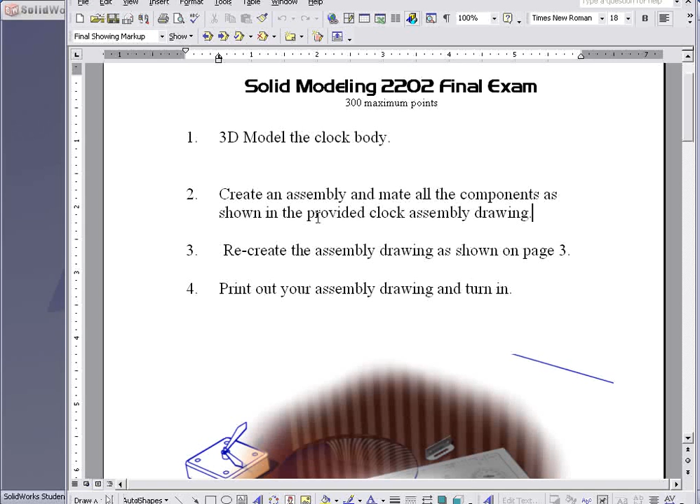There are components already in your folder. If you look under your SolidWorks sample files, you'll find the clock parts, and they're all inside of a folder. So here's actually the drawing that you can use to generate the model that we need to create first in order to create the clock.

So we begin by going to SolidWorks and go to File, New, and make sure that you are in an ANSI inch template. Most likely you don't have these templates on your computer, so you'll have to go over to the tools options over here and make sure you select ANSI and inch with 3 decimal places.

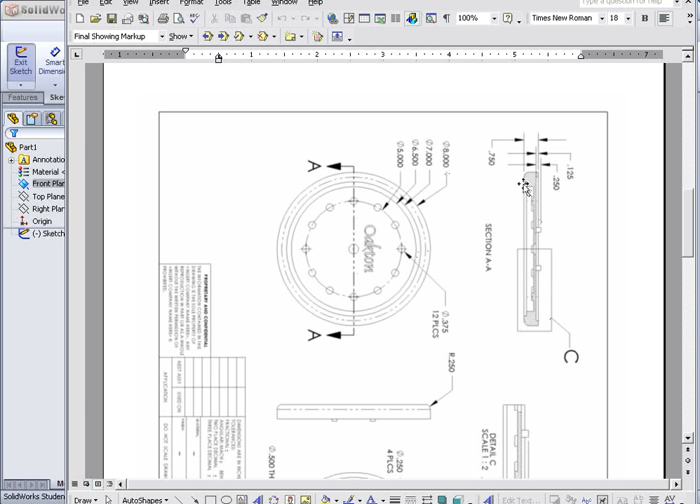Okay, we're going to begin by selecting the front plane and start our sketch. Now as we look at the drawing here, basically it's just a circle to start off with, an 8-inch diameter circle, and the thickness is going to be about 3/4 of an inch. So let's take the circle tool, drag out our circle, go to Smart Dimension, and plug in 8 inches.

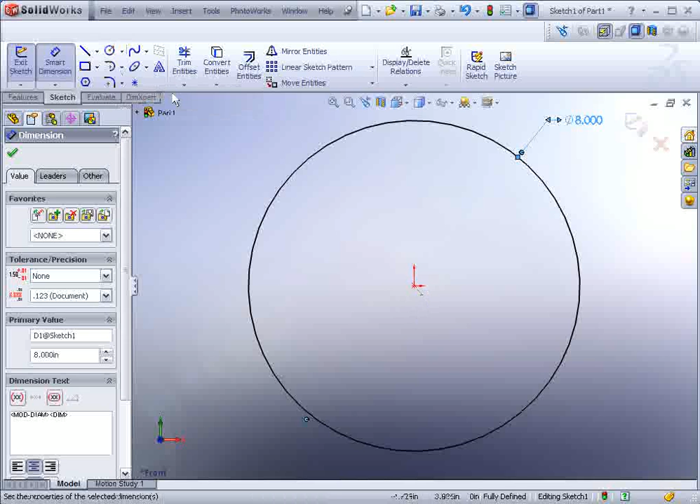Now we could go to Features. Actually, we could put the center circle in as well. Might as well get that out of the way. And that's a 1/2 inch diameter. Okay, now we could go to Features and Extrude Boss 0.75.

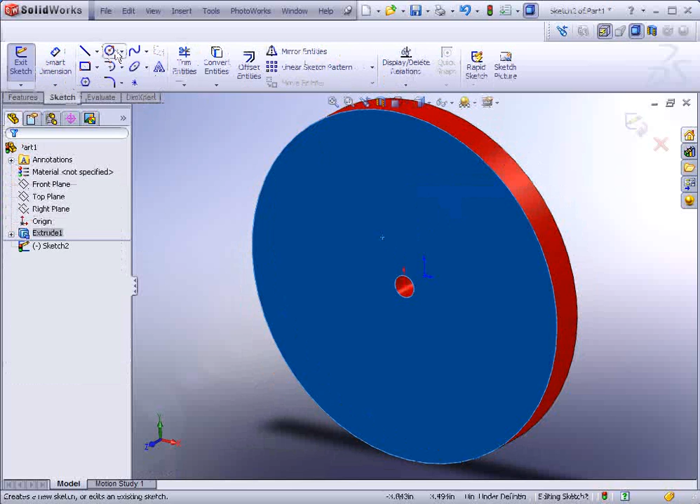The next thing we're going to do, we'll select this face here, start our sketch, draw another circle from the center out, and dimension that. That should be 7 inches according to the drawing here. And that's going to go a depth cut of 0.125. So we go to Features, Extrude Cut, 0.125.

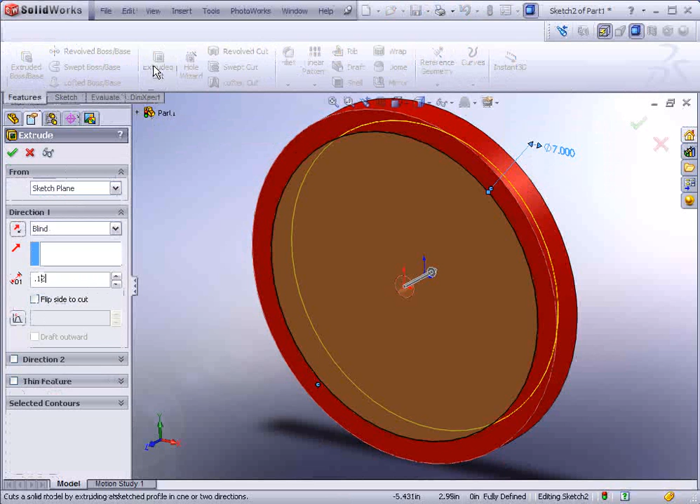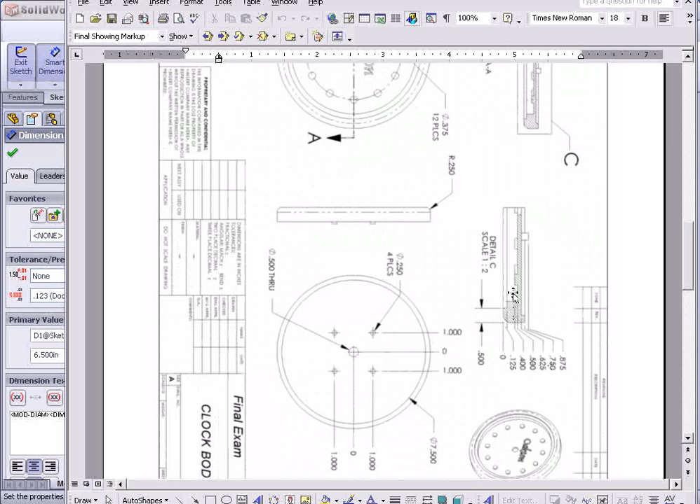Okay, now we're going to go ahead and start another sketch right on this face. And again, in the center of the circle, this is going to be 6.5. And as we look at the drawing for that 6.5 inch depth, we can see we drew it off of this face right here, so we just need to go down to a 1/2 inch. So we go to Features, Extrude Cut, 0.5.

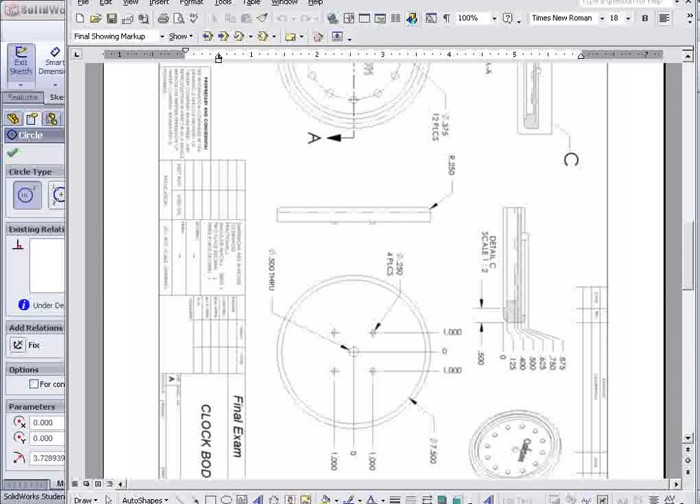Okay, the next step is let's go ahead and flip it around and select the back face, start our sketch, and draw a circle there. And according to our print, we can see that's 7.5, and that goes a depth of 0.125. So we'll dimension that, 7.5. And then Features, Extrude Cut, 0.125.

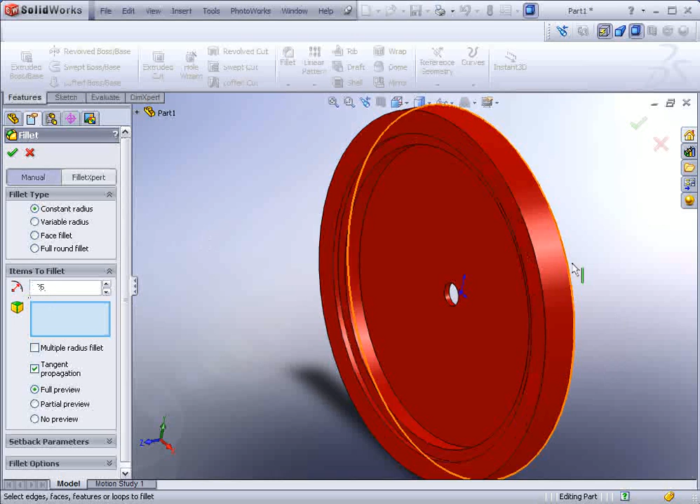One thing you don't want to forget, make sure you put the fillet on. The fillet, according to the print, is going to be 0.25. Select the edge and apply.

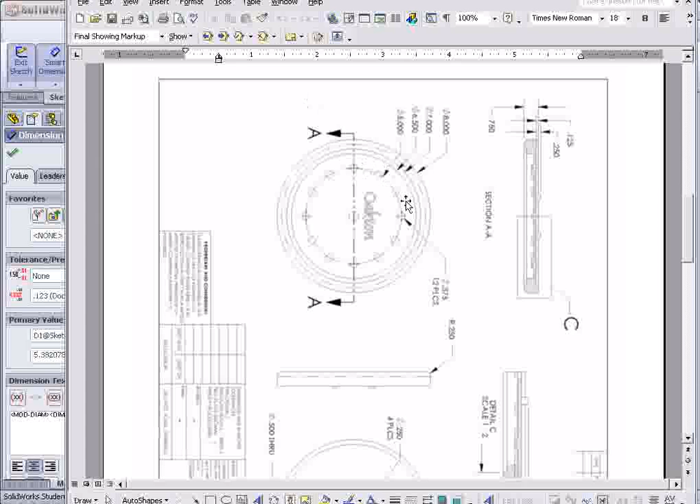Okay, now we're going to put one of the little buttons on here. So we'll start a sketch. We're going to draw a circle from the center out, and right away make sure that's set to for construction. This is very important. While that circle is still selected, check the for construction box so it's dashed, meaning that SolidWorks will not try and extrude it when you add this material. So now we could go and dimension that. And according to the print, that is going to be 5 inches.

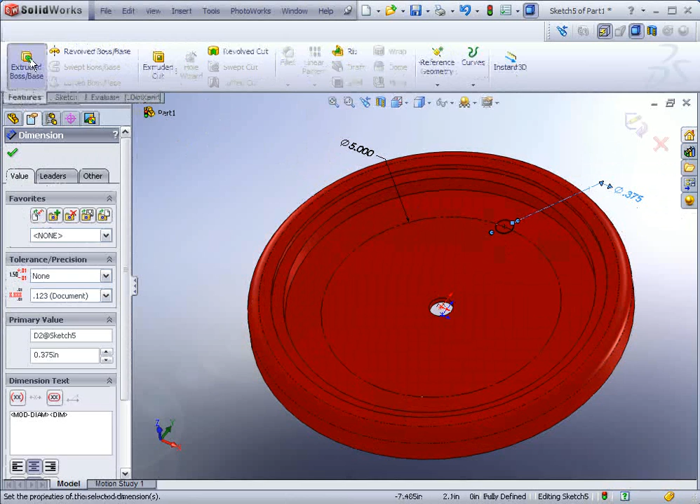And now we could take the circle tool again, and at the quadrant up at the top here, draw out a circle and dimension it according to the parenthesis, 0.375. And now we go to Features, Extrude Boss, and that's a raised boss of 0.125.

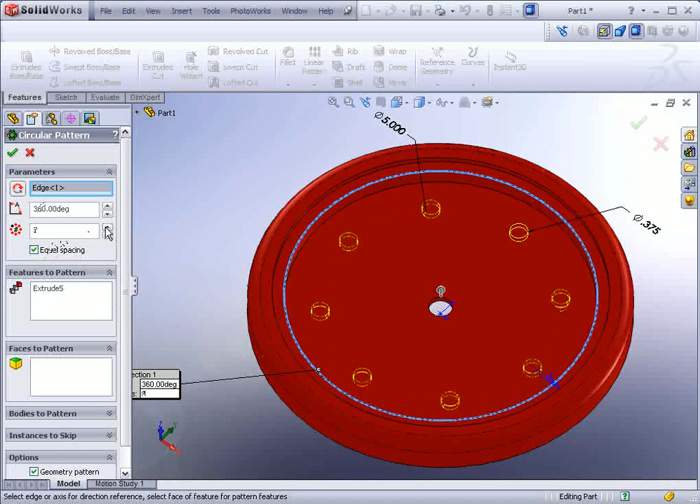And now we get to make a circular pattern of 12 of these. So we go to where it says Pattern here, Linear Pattern, find Circular Pattern, and the axis for the pattern can be any of these edges. And make sure it's set to equal spacing, 360 degrees, and make sure there's 12 instances. And apply.

Okay, now we have to work on the back side, so we'll select this back face here. We'll go Normal To, and we'll draw some center lines. So we go to the line, instead of line, make sure you select center line, draw a vertical center line, and then a horizontal center line.

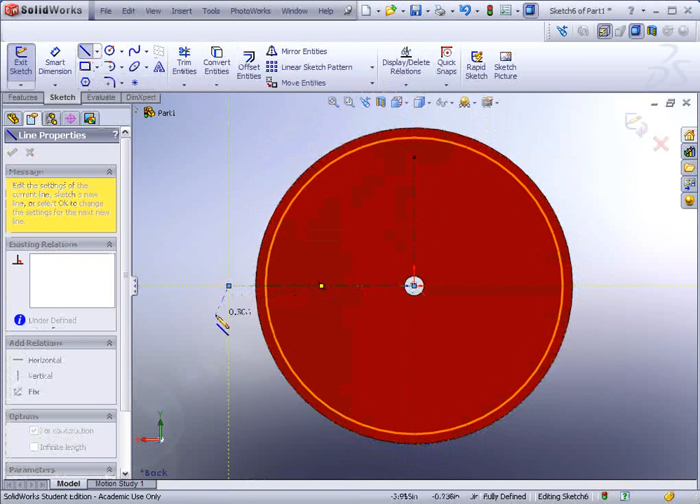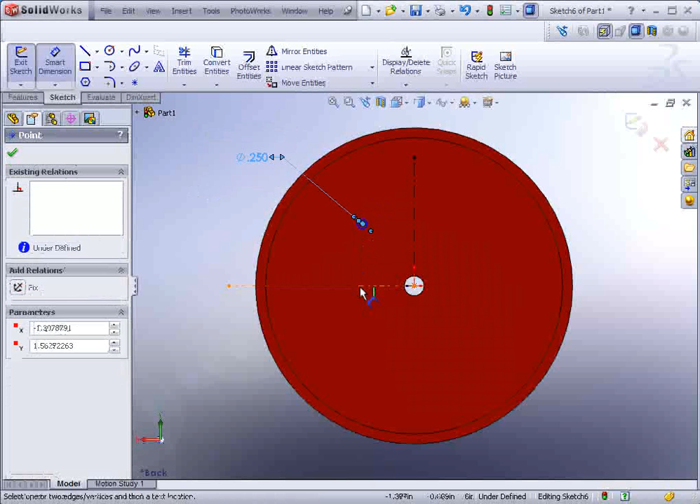And draw a circle right in between those two there. And let's dimension it. And the diameter, I believe, is going to be 0.25. And it's 1 inch from the center. And make sure you locate it 1 inch from this edge and 1 inch from this center line.

Hit apply. Now you just have to mirror it. Click and drag a fence around the vertical center line and make sure you envelop the circle itself, and then you should be able to click on mirror entities.

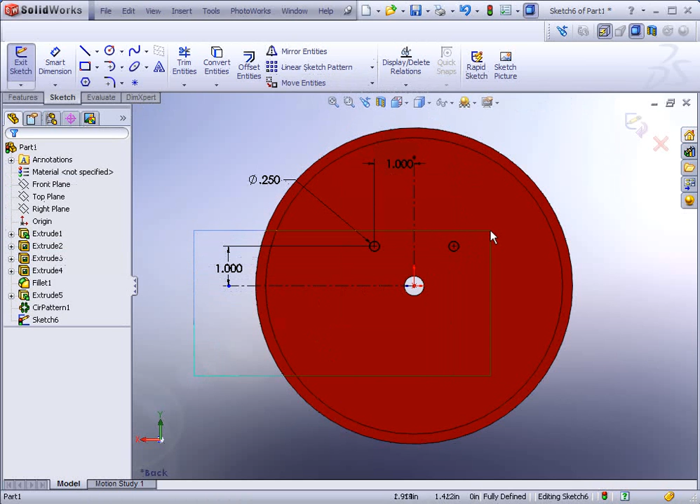Now click and drag a fence surrounding the horizontal center line and the two circles. Make sure that if you drag it from left to right, that you don't have the vertical center line in the selection mode. If so, you could always hold the control key down and click and deselect it. And we'll hit mirror entities again.

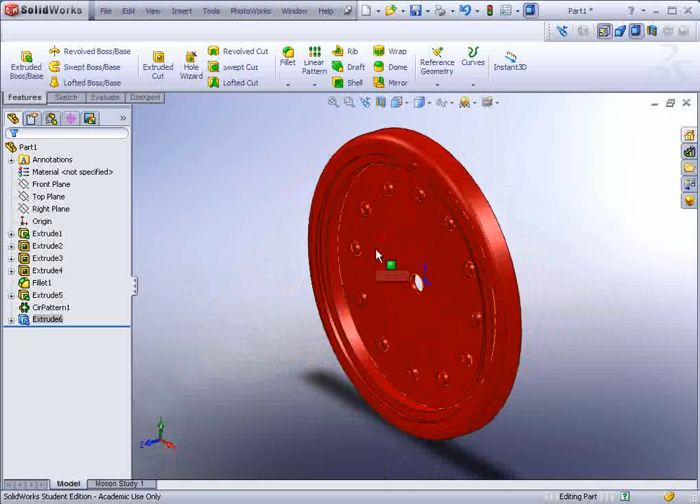So now we have our 4 posts, which we just have to extrude. And these get extruded 0.25 high. And that completes the first part of this test. Now just make sure you save this. And we will save this as the clock body.

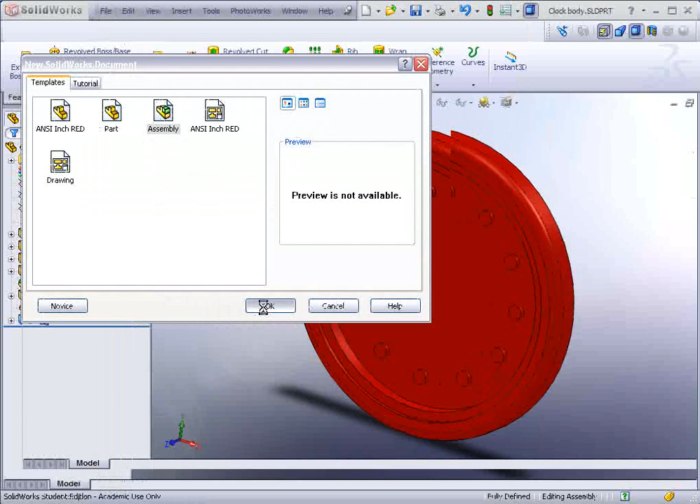Okay, step 2. Now we get to bring this into an assembly and start building it. So what we're going to do is we're going to go over here to File, New, and select Assembly. And we could select the clock, and we could drop it in at the origin. If you don't see your origin, go to View and turn on Origins. Drop it right in at the origin. There it is.

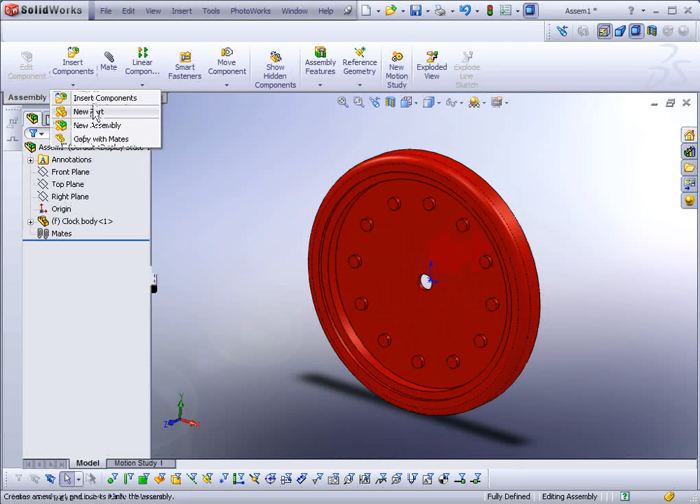And the next thing we're going to do is start inserting the other components. So to insert the other components here, it's just a matter of going to Insert Components and select that. Go to Browse and make sure you locate your Manufacturing 2202 sample files and final clock parts. And the first thing we'll drop in here is, let's drop in the chrono housing. Hit open, drop it right over here.

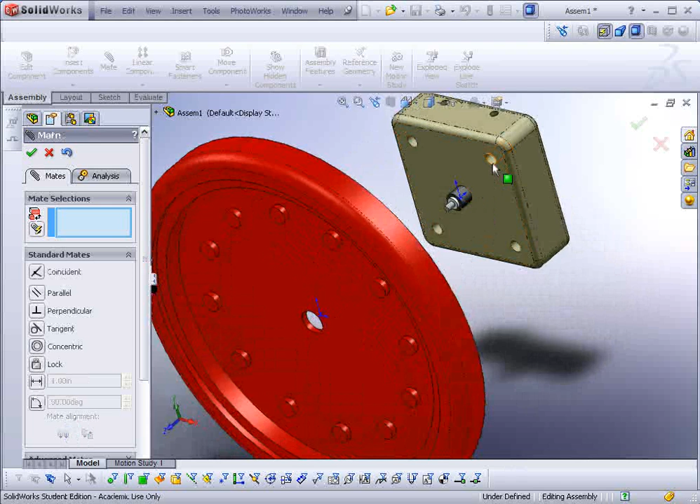And now we have to mate that, so we'll take the paper clip, we'll select this face here to this face right here. Make sure it's pointing the right direction. In this case it's not, and that's why we have this little button here, Flip Mate Alignment. The next thing you could do is you could select the edge of one of these holes and make sure you find the aligned hole to it. Select that edge. And there it is. Completely mated. Needs no more mates on that particular one.

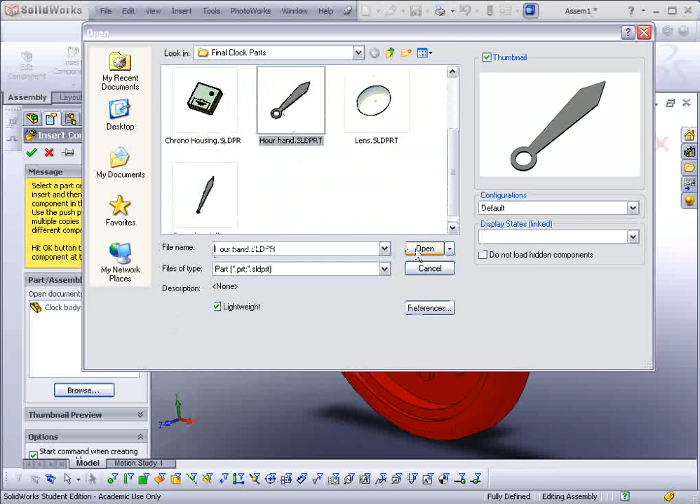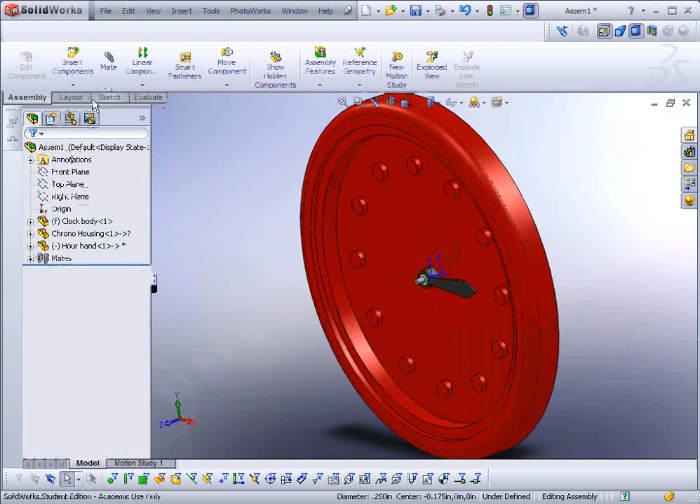Let's drop in another component. Insert Component, Browse, and let's start dropping in the minute hand. Actually, we'll drop in the hour hand first. Click and drop in front. Select the mate, select this edge, and make sure you select the edge transition between the black and the white surfaces. And you might need to flip it so it's not overlapping the model or intersecting. Okay, hit apply.

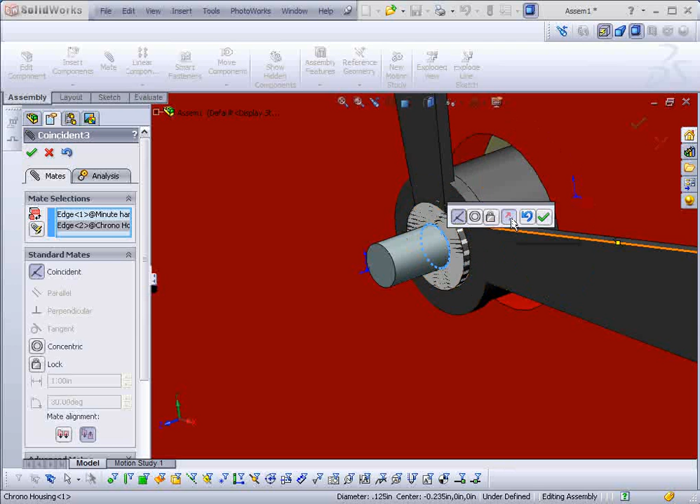Let's go back to Insert Component, Browse, and we'll select the minute hand now. And do the same thing. Go to Mate, select this edge here, and select the transition between the gray and the white surface. So right there, that edge. And if you see a zebra stripe, that's an indication that there's an interference taking place. So just make sure you hit the Flip Mate Alignment so it flips on the outside. Okay, and if you did it correctly, it should point to 3 o'clock.

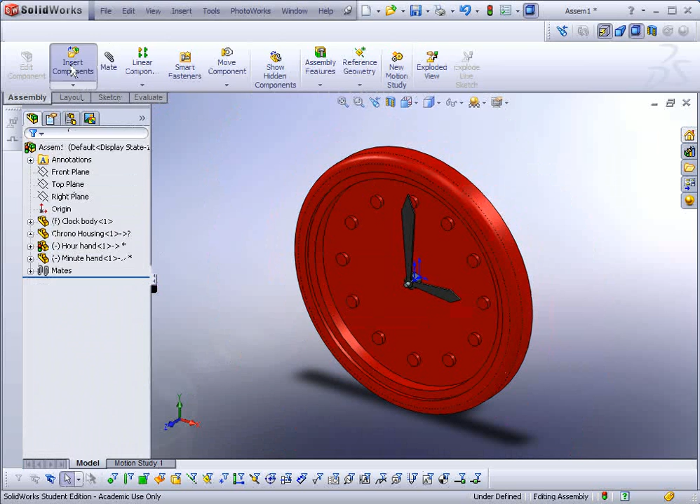Also these can be moved, so it's not really a big deal if for some reason something happens and they don't look exactly right. But next thing we want to do is we're going to go ahead and drop the lens in. So again, we go to Insert Component, Browse, let's find the lens, drop that over here, select Mate, select the edge there, and then this little lip. And we can see it's in the wrong direction, so again we hit Flip Mate Alignment and apply.

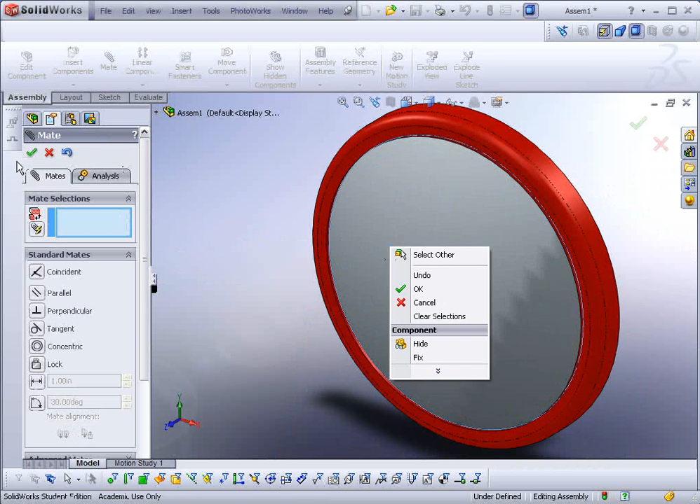Okay, if you want to see through that lens, it's just a simple right click. Actually, we'll hit apply first to get out of Mate. Now you could right click on the surface of it, and there's this change transparency option. It's not a requirement, but if you want to see your clock body components inside there, that's not a bad idea.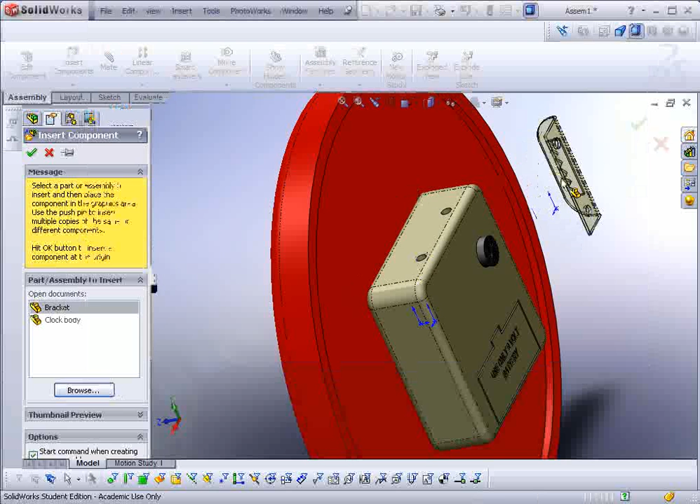Alright, the next thing we have to do is drop in the little flange that goes on here and then the bolts. So again, we go to Insert Component, Browse, and we'll select the bracket, drop it over here, and proceed to mate it. Select the edge there, and make sure you select the relevant edge, in this case, this one here. If you need to flip it, click on the flip and hit apply.

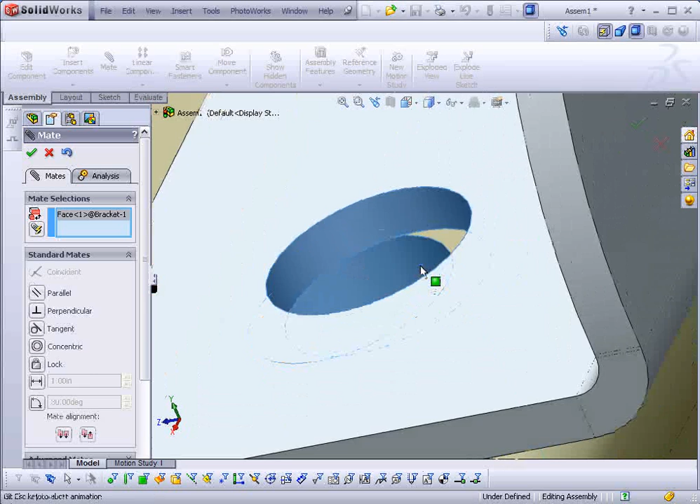Now the next thing we're going to do is we could just go ahead and align these two holes. So I just grab this with the left mouse button, drag it over a little bit, select that surface and this surface to align the two holes. Hit apply.

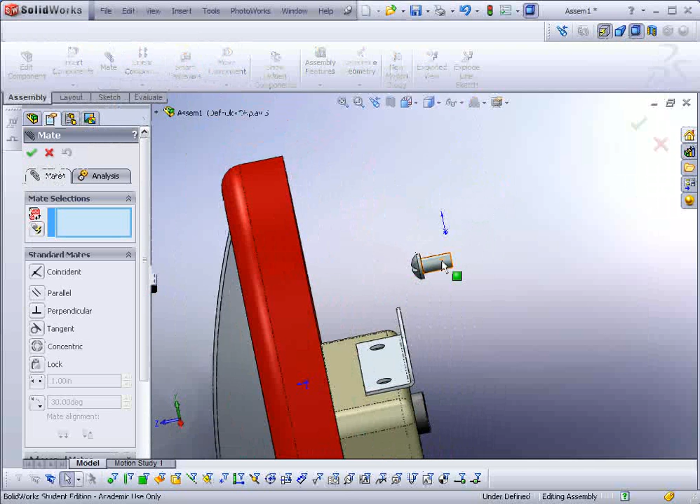Insert Component once again, Browse, bring in a bolt, drop it nearby the hole. So, not a bad idea to make sure it's a little bit above this surface here like this, or else it will intersect the part, make it a little tricky. But let's go to Mate, select this face here and that face.

And then if you want this to be to this surface, actually let me clear that selection there. Select this surface and then flip this around and select this underside face and hit apply. Okay, now I'm going to drag off a copy. I could go back to Insert Component and bring in another one, but here's another simpler way.

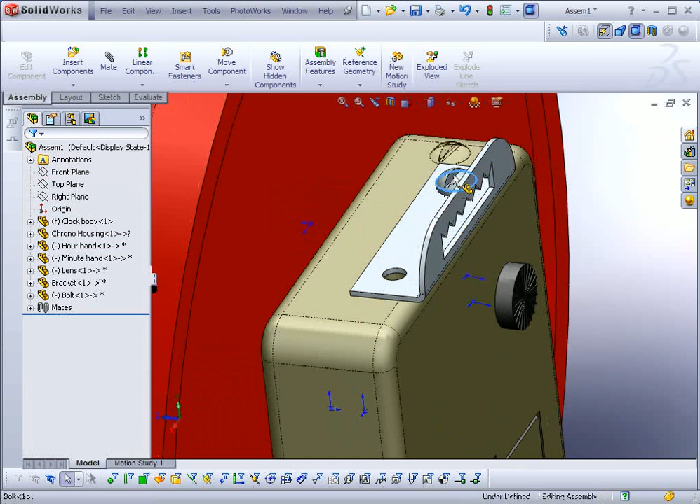Hold the Control key down, then grab the bolt, make sure you hold the left mouse button down, and drag off a copy. Release the left mouse button first, then you can release Control after you see the copy made. And now once again, we could go ahead and use the Mate tool and select the surfaces that we want to align these two.

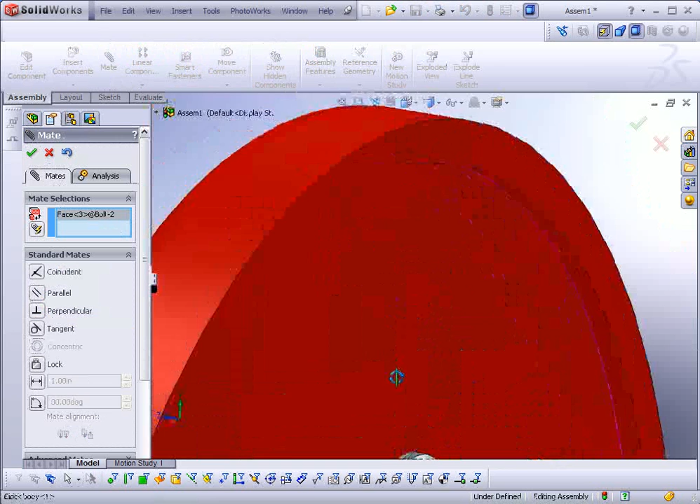Drag that up a little bit so we could see it. We want this underside face to contact this face here. Alright, make sure you save it. Almost done with this, but it's not a bad idea to save these regularly. Because the next step is we need to explode this for our drawing. And we can't do that in the drawing. It has to be done in the assembly file.

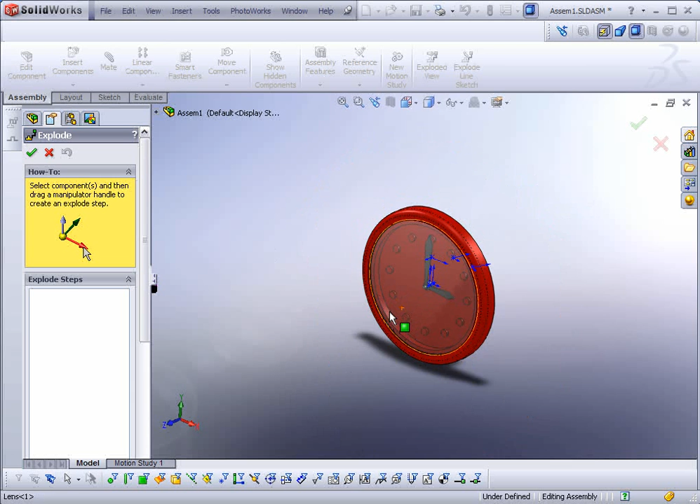So we go to Exploded View. We want to grab the lens. The trick of grabbing the lens, because it's set to transparent, it'll try and grab through it. The Shift key on the keyboard, if you hold that down, it will select the transparent object first. Hold on, actually. It seems to be giving me a little bit of a headache here, trying to select the lens. Okay, apparently mine must be turned off. Anyway, I didn't have to hold the Shift key to do it, but generally you do.

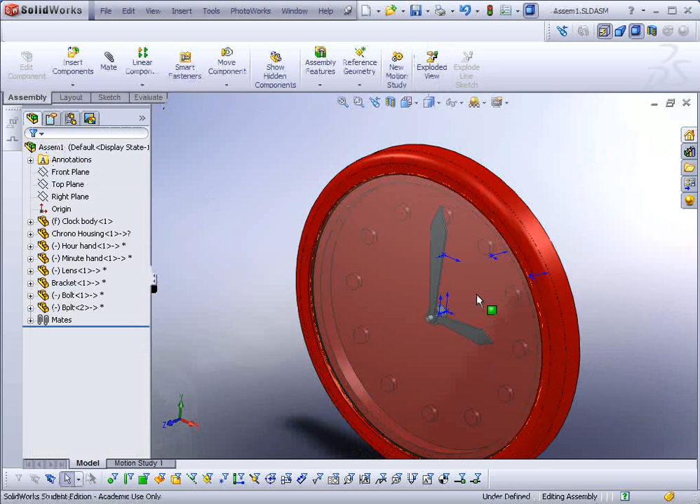Grab the rocket, that little line there, drag it forward with the left mouse button. Then go ahead and select the minute hand, then select the hour hand and grab the rocket again. Oh, wrong one. Select it through the part for me there. Actually, I'm going to hit the undo button because I didn't want that part just yet. Let me cancel out of here for a second. Apparently it was selecting through the model. That's okay. Let's go back to Exploded View.

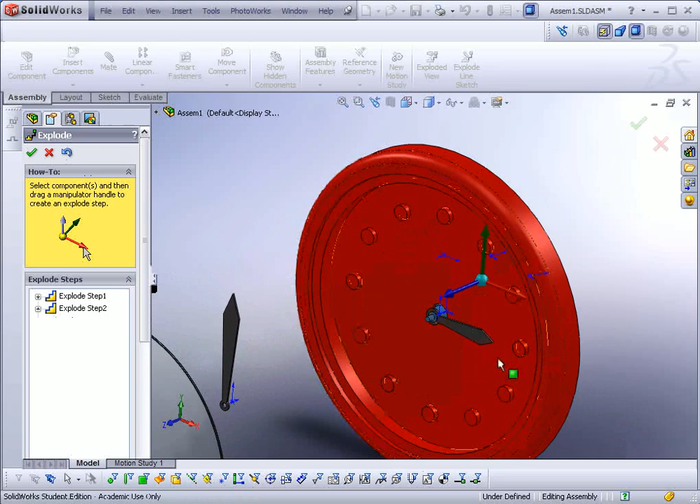And we'll do that again. We'll select the lens, drag that through, select the minute hand, select the hour hand. Seems to be maybe a bug there. Just get rid of that one. And I'm going to deselect it and try and select this a little more discreetly. Okay, I had to rotate it a little bit. Looks like it's a bug in this version of SolidWorks. I will drag that forward.

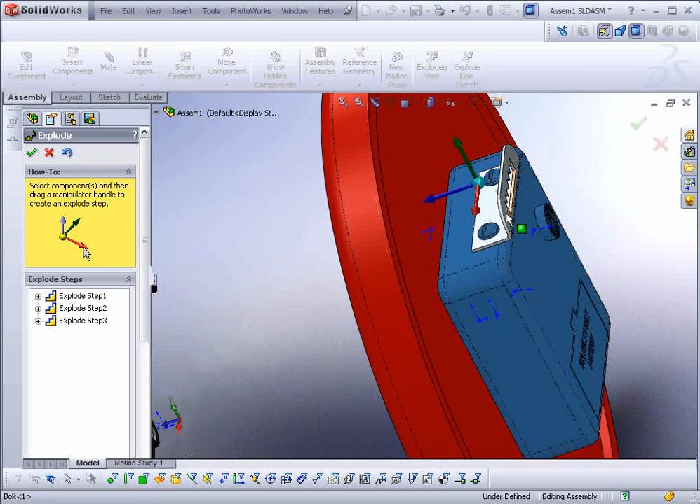Now we could go ahead and select all of these components that are attached, with the exception of the clock bezel. And I'm going to drag the bracket back. And now we could select the bolts and the flange. And then drag the bracket. Drag it up a little bit higher. And now just click on the flange and drag it down.

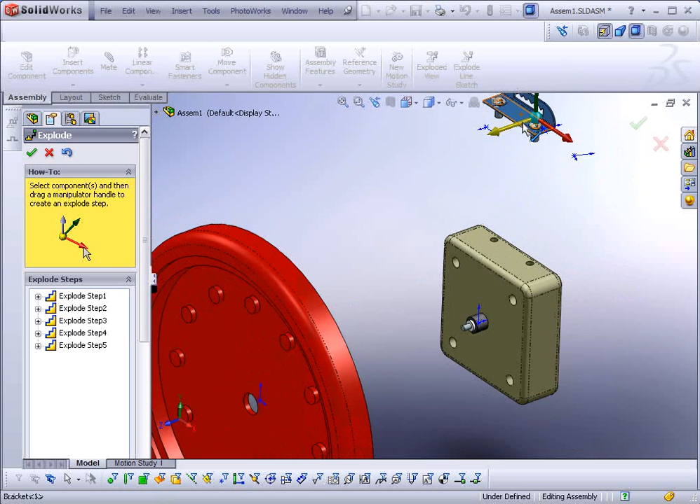Okay, the next thing to do is let's go ahead and apply that. And now we could add the exploded line sketch. The exploded line sketch, we just select an edge here, make sure that the arrowhead flips, and then select an edge over here, not a point, and hit the green check mark to apply.

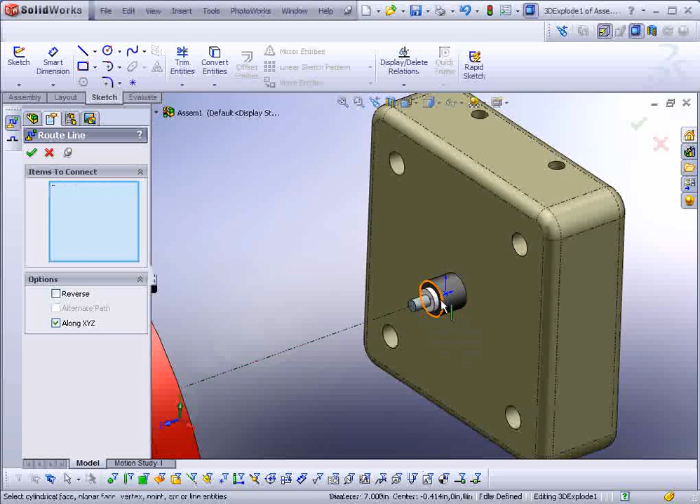And then same with these. Click on this, make sure the arrowhead points in the direction the line's going to be drawn. Hit apply. Flip the bracket and apply.

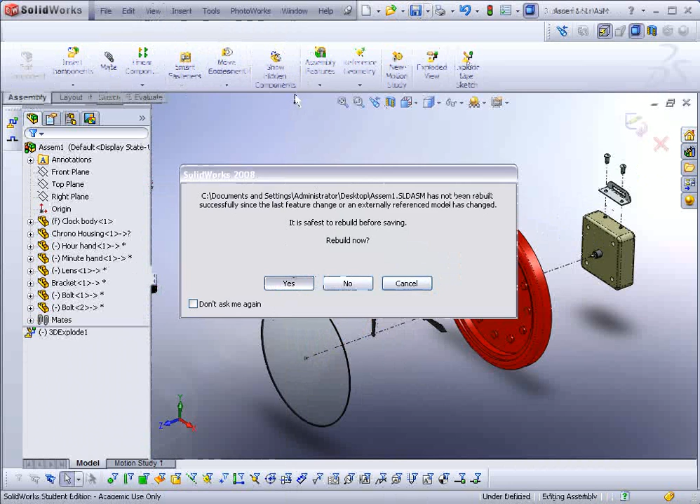Okay, now we can just go ahead and save what we have. I'm going to actually go to View and turn off Origins. Go to Save. If you get a message, Rebuild Now, just hit Yes. And you've finished the second portion of this. Now we just have to create a drawing from it.

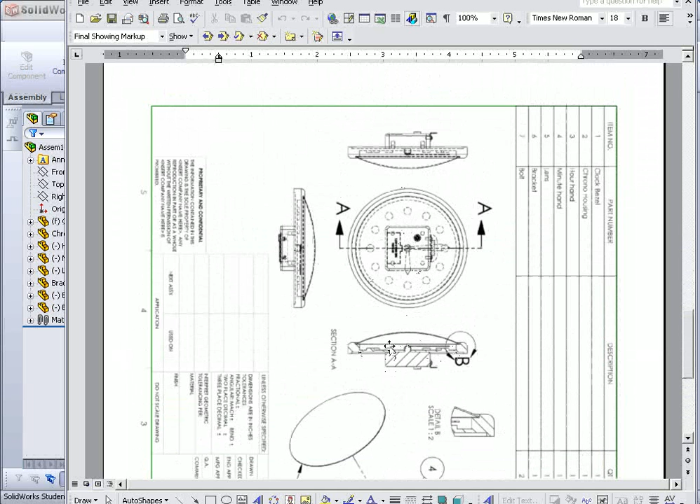So take a look at the drawing that you have to generate. It has to have the isometric view, has to have a front view with hidden lines, a bottom view, a left side view, a section view to the right with no hidden lines, and a detail view with no hidden lines. Also, you need a bill of materials and balloons and your name.

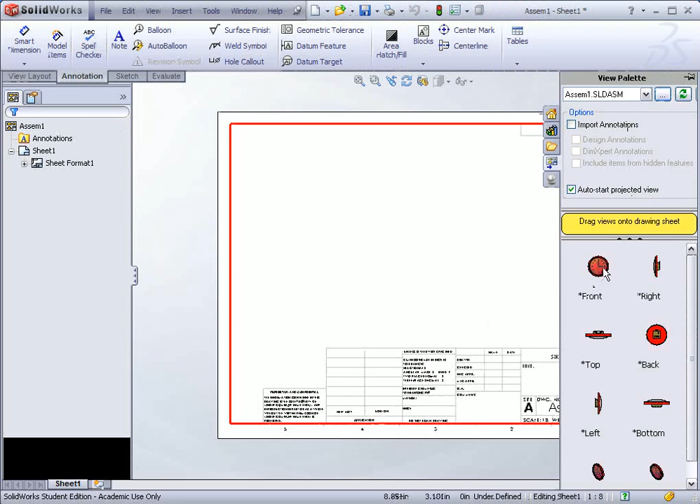So let's get started. To do this, we could just go to File, Make Drawing from Assembly. Make sure you select an ANSI A size. Actually, you probably don't have that template, so make sure you select just an A size sheet so you can print it out. And now we're going to go ahead and drop in the front, drag out the left, the bottom, and an isometric, and apply.

Bring the isometric over to the right, drag it out in the open, then right click, and from here you're going to go ahead and select Properties, and there's a checkbox, Show in Exploded State.

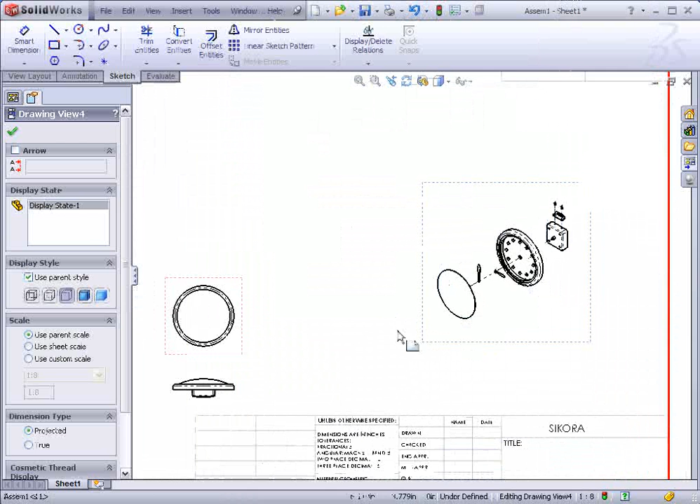Now this should be hidden lines, so we select the view, and over on the left, while it's selected, we'll see hidden lines visible. Okay. However, notice it turned all of them that were related to that hidden lines, because it's a master view. So this one we don't want hidden lines, so we'll select that, and we'll select the hidden lines removed option.

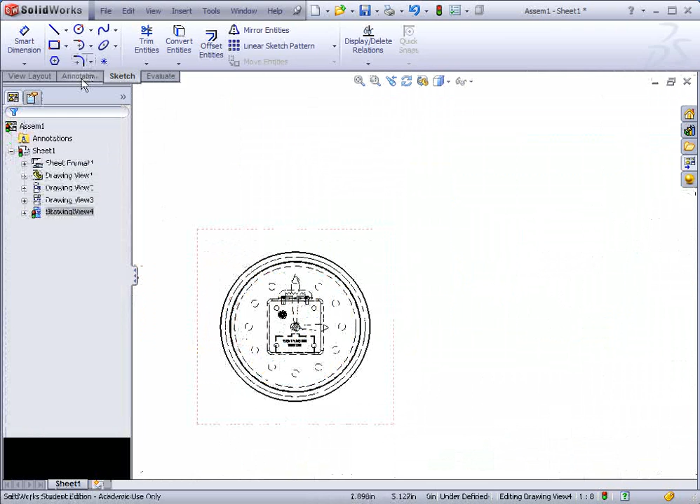Now for our section view. Under View Layout, we find the section view icon. Glide up, make sure you infer to the quadrant, click and drag it straight through, all the way up above the other one. And we want auto hatching activated. That will change the hatch pattern per part. And we probably want to flip the direction here. So hit OK. And I'll click to drop it to the right side.

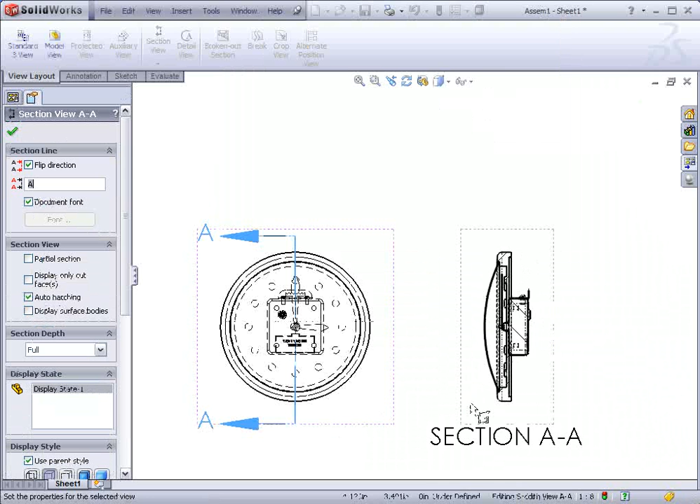Now you'll see the hidden lines are turned on here. So again, make sure you select the view and over to the left here, find hidden lines removed. The next thing we're going to do is a detail view. Select the detail view, glide up to some certain area that you want to show a detail of. I'll select this area here and drag off the detail view.

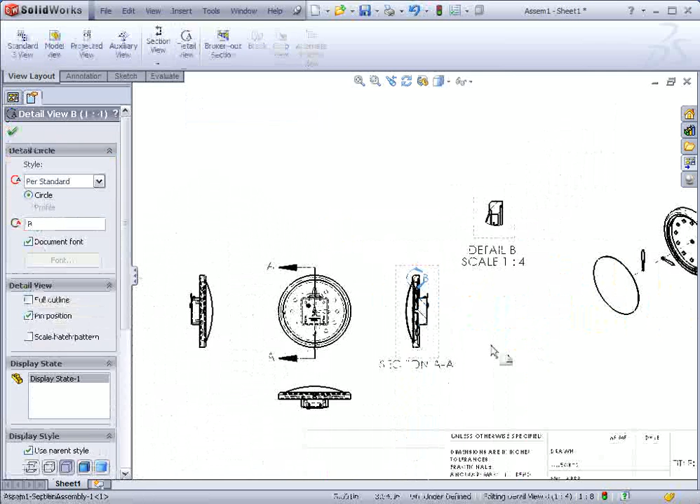Okay, as for the isometric view, we might want to enlarge that. So select the view so you get the blue border around it. And over here we could say use custom sheet scale, and let's change it to a quarter scale. Hit apply. All right.

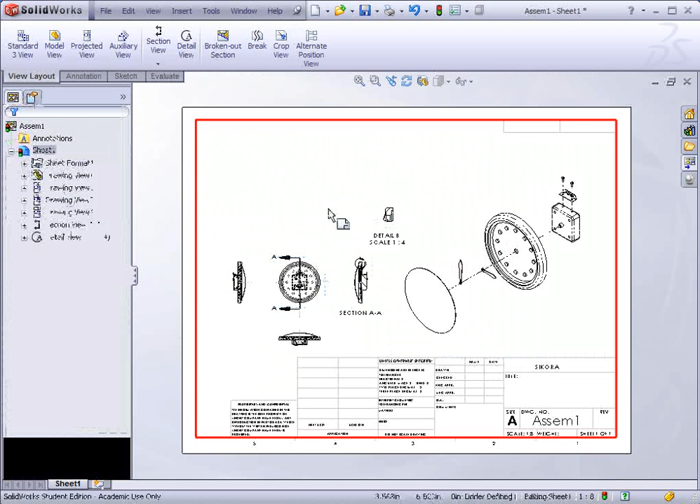The next step, again, make sure your name's on there. That's done under annotations. You can select note. Also, let's add some balloons. There's auto balloon. Let's select this view. Click on auto balloon. This is under annotations again. And we'll do a circular square. Actually looks pretty good. Hit apply. And then locate these however you like so they look decent, and that they're not off the page.

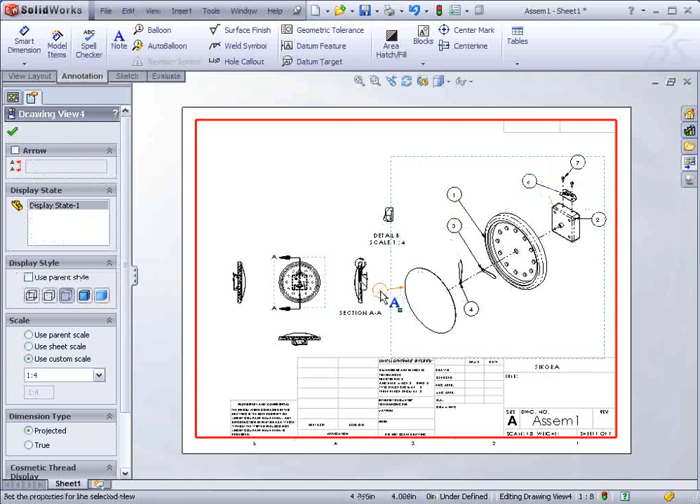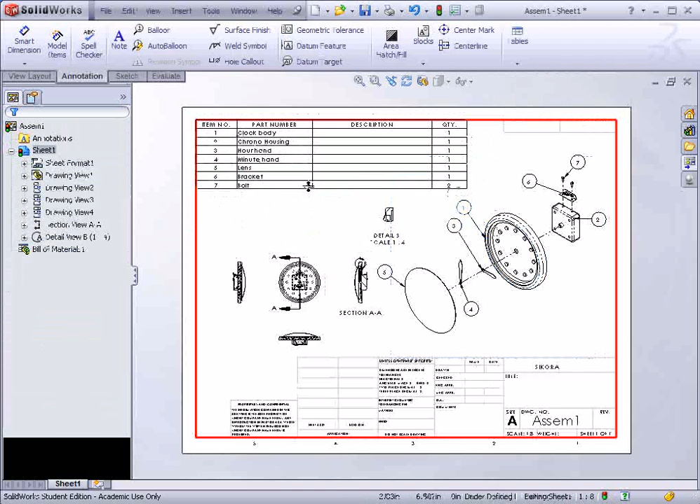Okay, while the view is still selected, go to Tables and create a bill of materials. Avoid the Excel-based bill of materials in this case. And just hit the green check mark and then drop it in the top left-hand corner by clicking and hit apply. If there is an issue with the size of your fonts on the sheet, you can change that by going to the Tools Options menu.

Go to Document Properties. First of all, make sure you're in ANSI. The units should be 3 decimal places and IPS, inch pound second. Annotations font, select that and make sure under Tables that you have it set to at least 12 maximum. 8 will work really well too, or anything in between there.

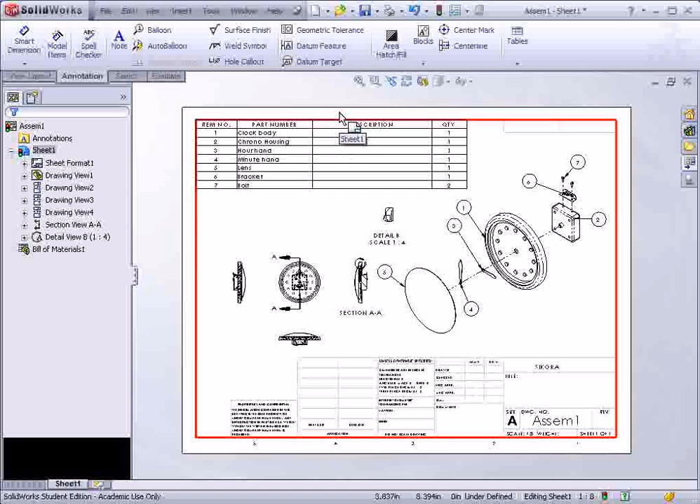Make sure the name's on there, full name, and save it, and then go ahead and print it. Turn it in, and you're done. And this concludes the review for the final exam for Manufacturing 2202.